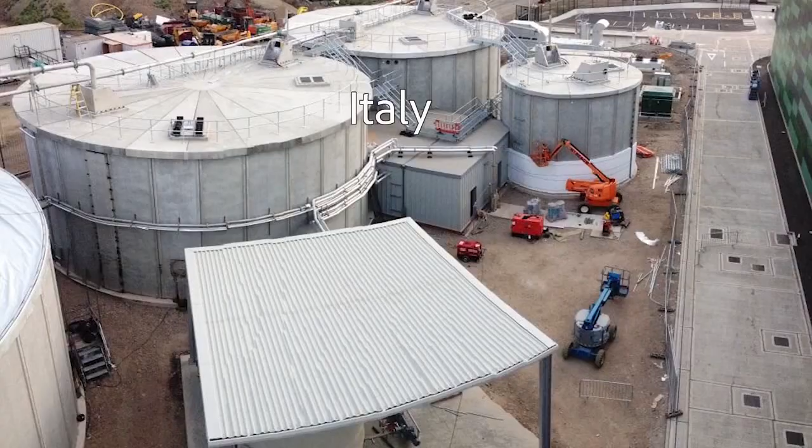The Energía team has acquired, developed, and integrated technologies that allow to maximize revalorization of solid waste. I'm Rob Murray. I'm the Vice President of Project Execution for Energía. I'm building projects around the world.

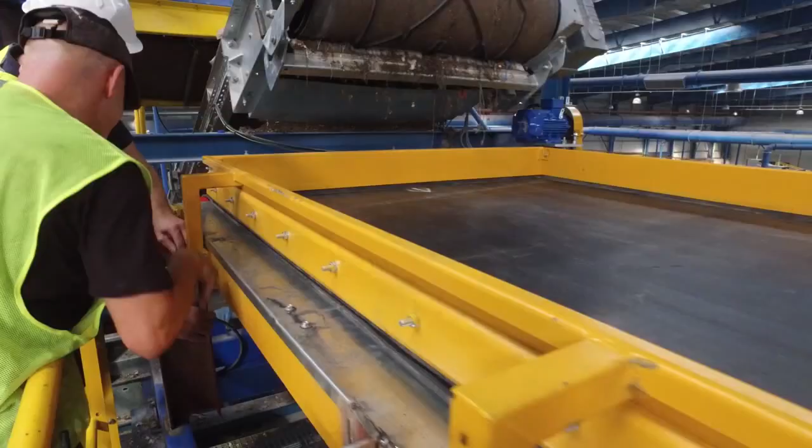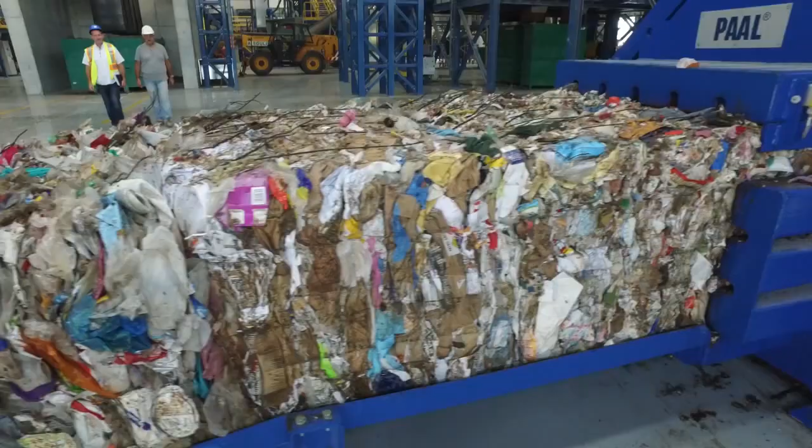The plant's fascinating to us from an engineering perspective because it uses state-of-the-art technologies to receive the trash and break it down into its fundamental components. The economics are helpful because the recycled materials can be sold, which helps offset the cost of operating the plant.

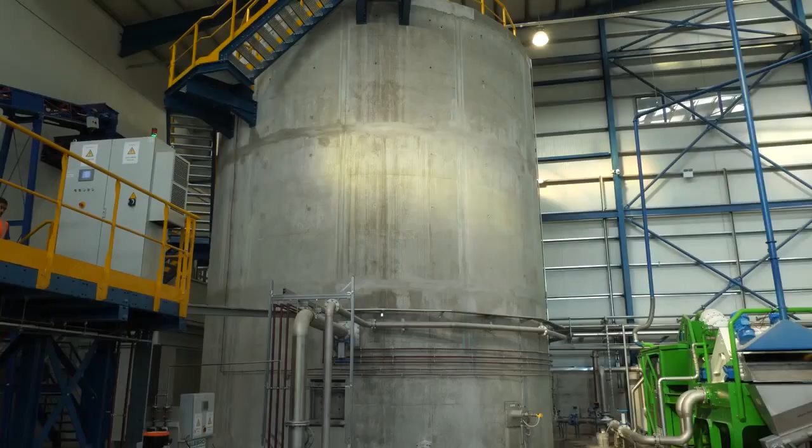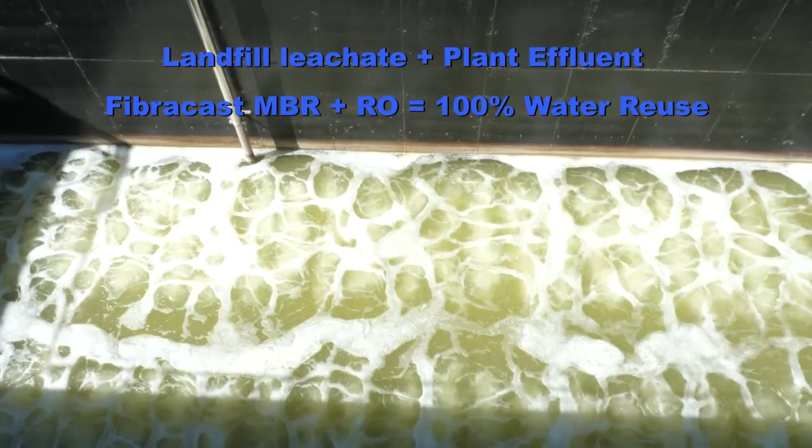Biogas generated from the organic portion of the trash being converted into electricity. Ultimately, the biological component becomes a fertilizer, which is reused in land application. And all the wastewater from the different areas of the plant is collected and treated and put through reverse osmosis, proving the concept that trash is a resource and the landfill is obsolete.

If you look at food waste and the amount of greenhouse gases produced by it around the world, it's actually as much as all of the transportation on the planet combined. We also lose the fertilizer value to restore depleted soils of both fertilizer and organic content.

Limassol had a big problem with the waste. 2 years ago, they were landfilling every waste that came. So we have been asked to make a plant that would treat the incoming waste and produce recyclables, secondary fuel, clean the air, clean water, and a very small percentage of waste still going to the landfill.

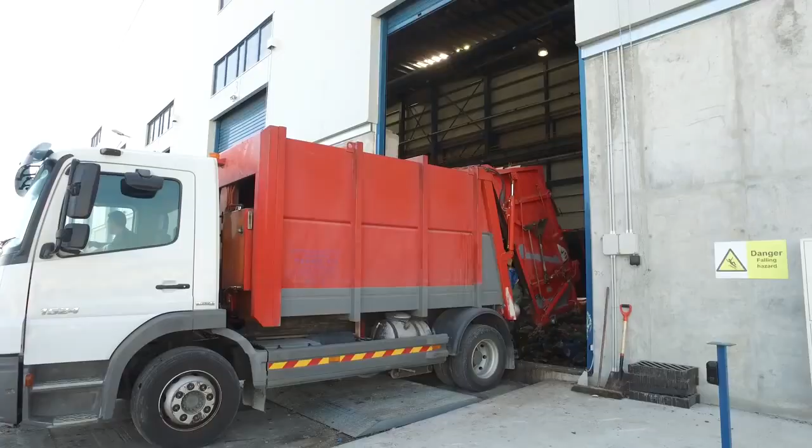The waste comes to the plant from the municipal trucks. They're weighed before coming up to the plant to know exactly how much garbage we're receiving. And then they dump all their waste into a tipping pit. This is a large bunker where we can store the garbage and process it.

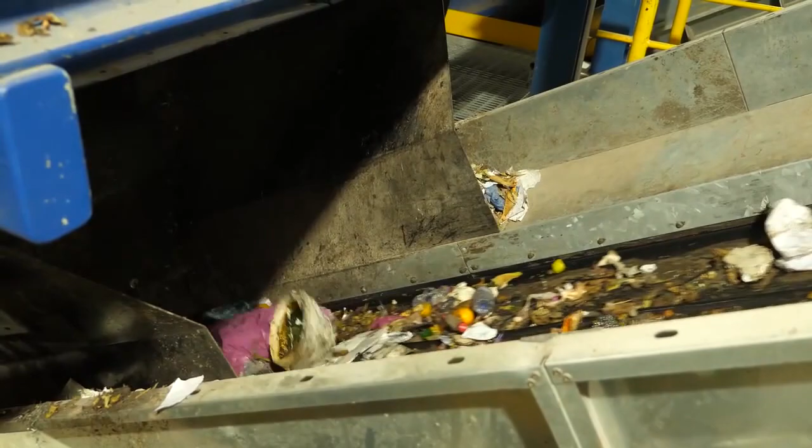From this pit, we have 2 overhead grapples that collect the waste and send it into the first step of the process, the bag openers. Most of our waste comes in garbage bags, so before we can access the waste inside to be able to treat it, we need to open those bags.

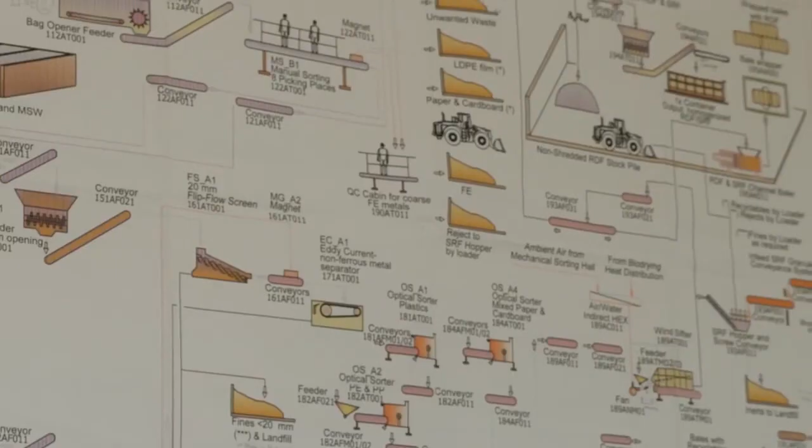Here we have pickers that take out specific items from the waste stream. We remove glass at this point, we remove long pieces of plastic film, electronic waste, medical waste. After the manual sorting, we have magnets which separate the large metallic pieces out of the waste.

After these magnets, we have machines called disc screens. The disc screens serve to separate the organic material. Waste smaller than a pre-programmed size falls beneath. So this is a way of separating the waste by size.

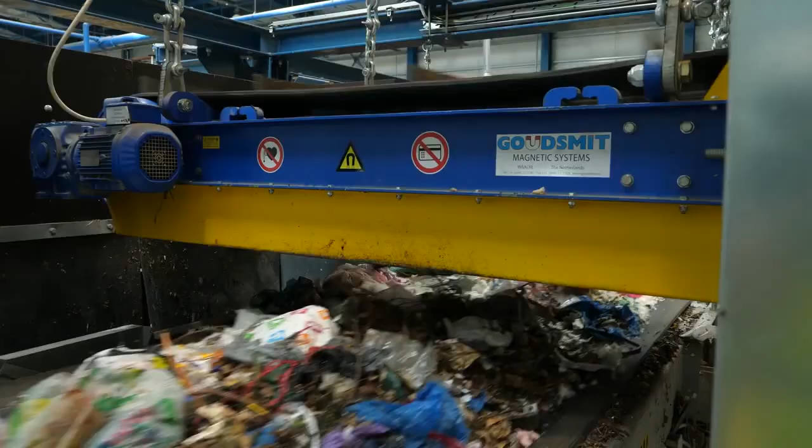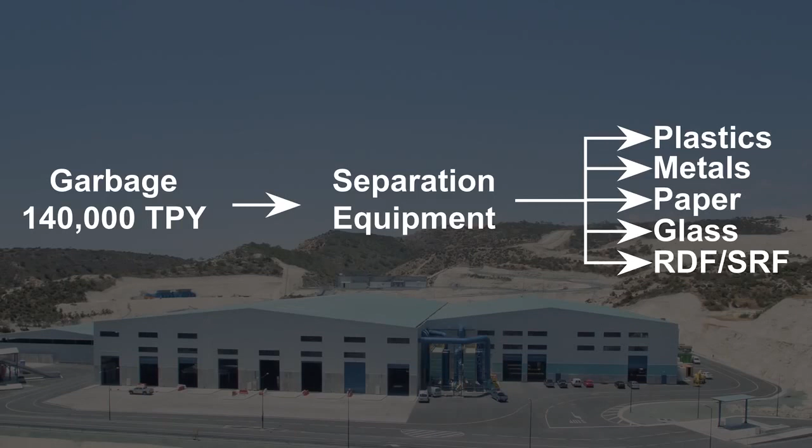Like other plants, we have separation equipment that allows to efficiently remove the recyclables from the waste, such as plastics, metals, paper, glass, and the RDF, SRF. Unlike other plants, we have the Oryx that extracts up to 95% of food waste from the garbage.

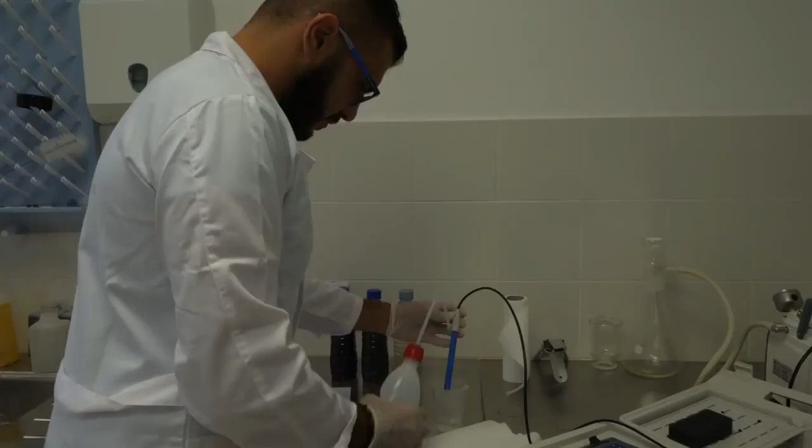This organic fraction is fed into the digesters, which is an important part of our process since it allows to generate electricity and fertilizer, thus reducing our cost of treatment and giving back to the earth the fertilizer.

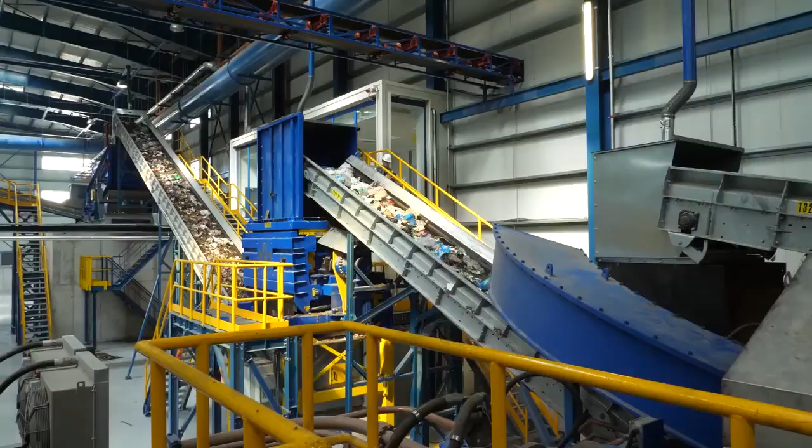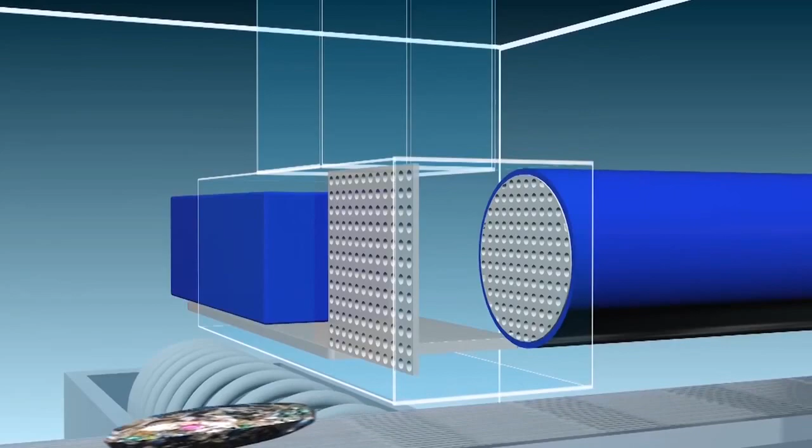The Oryx is a key piece of technology for this plant because it serves to very effectively separate the organics from the non-organic material. The way it works is a very high level of pressure is applied to the waste. Anything organic which is found in this waste is liquefied by the pressure. This paste is conveyed away for treatment and biogas production. In Limassol, we only send 11% of the residual waste back to the landfill.

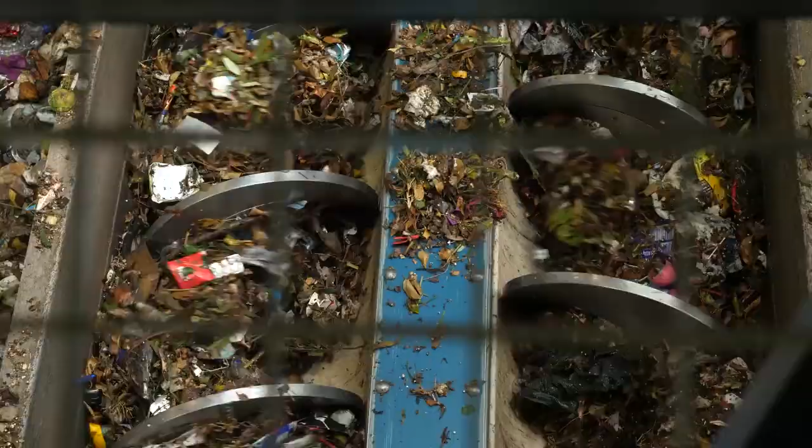After the mechanical sorting and we've recovered the organic polished pulp, we digest it in these large mesophilic anaerobic digesters. They're operated at 38 degrees Celsius, and that produces a very rich biogas high in methane.

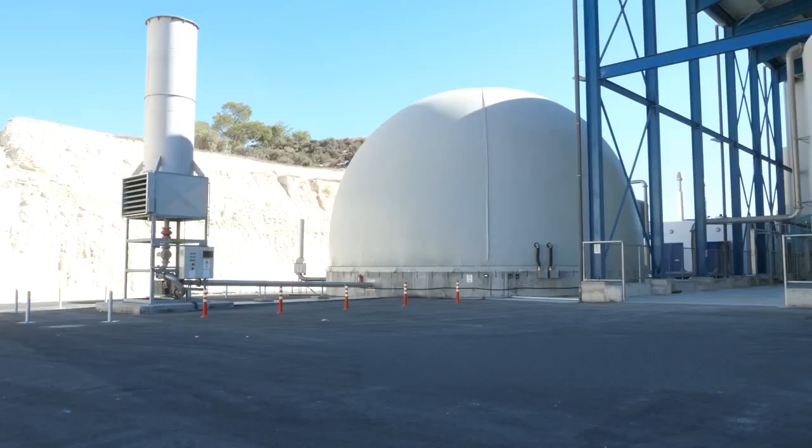The combined heat and power units generate nearly 2 megawatts at this plant, and it's enough to completely satisfy the load of our mechanical sorting facility, our wastewater treatment plant, and all of our digestion technology.

This has never been done before. We don't actually consume any net amount of water. We generate a surplus of electricity. We sell the recyclables. We're land applying a fertilizer. And the story is very, very exciting for us in the engineering world.

I mean, we bring in waste and we take out clean air, clean water, plastics, paper, fuel. It's amazing. If you come and see the truck coming in and what goes out, then you can just be happy.

Growing up, I remember running around on the beach and wondering why there were tin cans or other things thrown around, and all this is changing. I'd like to state how proud I am as a citizen of Cyprus to see this state-of-the-art facility bringing innovation and change, positive change for the environment and our natural resources.

I dream of a world where we humans find ways to stop depleting and start healing. This plant and the many that will follow will make the world a much better place.